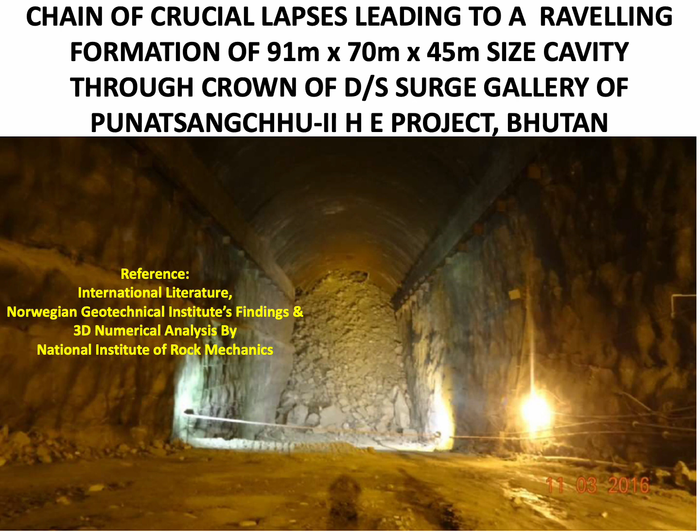In this case study, I am going to present the chain of critical lapses which ultimately led to the ravelling failure of rock mass, which formed a huge cavity of a size of a football field and of one third the height of the Eiffel Tower to the crown of the cavern of Downstream Surge Gallery of Punatsangchhu II Hydroelectric Project in Bhutan. The crown of the Downstream Surge Gallery, having been excavated and supported since 2013, saw massive rock mass failure occur after 3 years, on 11th March 2016.

Unfortunately, 6 technicians got buried dead under the failure falling muck. Billions of rupees got wasted, and uncertainty of completion of the project with 6 years of delay as of December 2022 crept in.

During the presentation, I'll be making reference to a number of international literature and also to findings of Norwegian Geotechnical Institute in their case study taken up by them, and also I'll be referring to 3D numerical analysis done by National Institute of Rock Mechanics, India.

The Punatsangchhu-II hydroelectric project was originally studied and designed to be a surface powerhouse in the detailed project report. However,

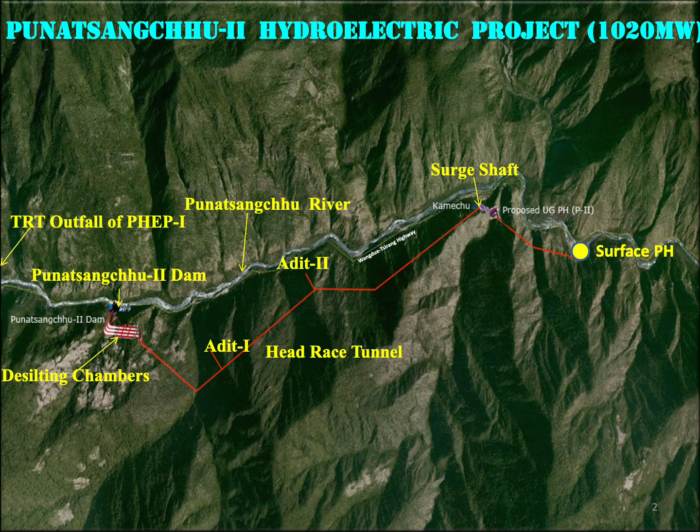during April 2010, just before taking up the construction of the project, a crucial decision was taken by the consultants of the project to shift the powerhouse complex location to an underground location 3.1 kilometer inside the right hand side hill of the river valley.

This necessitated introduction of a 3.1 kilometer length of tail race tunnel, and also it necessitated introducing a downstream surge gallery.

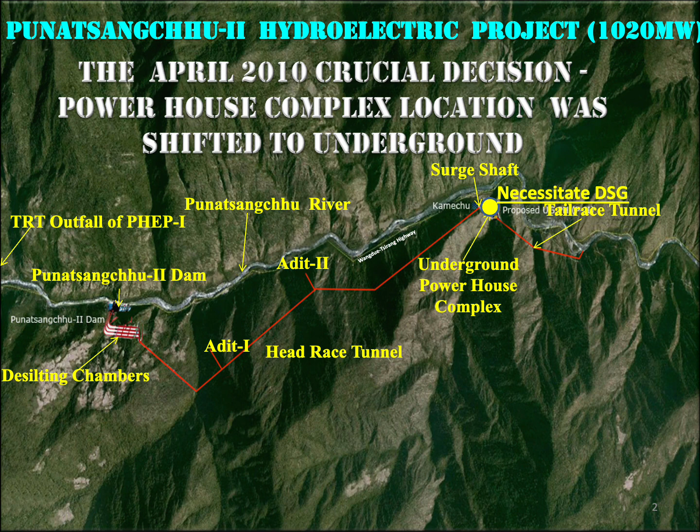Thus, the powerhouse location was changed from the DPR approved surface powerhouse to the underground as decided by the consultants WAPCOS and the design consultants Central Water Commission.

The first of the crucial lapses had happened during May to October 2010 when, during the geological investigations done by the consultants for deciding the underground location, a lacking and misrepresentative geological investigation done by consultants had landed the powerhouse complex in an unsafe underground location.

The 314-meter long downstream surge gallery site was investigated by the consultants who decided the change of location based on merely one borehole, DSC1. The other borehole, DSC3, was driven by the consultants at a different and faraway location to that suggested by their own geology consultants, Geological Survey of India.

The downstream surge gallery had actually encountered an intersection by a mega shear zone, which was far away from borehole DSC1. Actually, all 3 caverns - the powerhouse, transformer hall, and downstream surge gallery - were to be intersected by the mega shear zone, which was missed during the geological investigations while deciding the new location of the powerhouse complex.

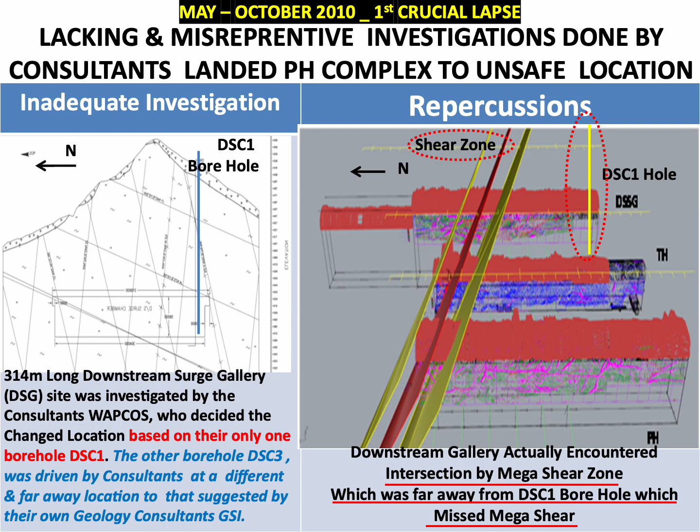The second of the crucial lapses in planning and design had happened during December 2010 when, after a limited geological exploration done for deciding the changed location, the designers had decided a huge 314 meter into 58 meter into 19 meter sized Downstream Surge Gallery, despite a warning having been given by their geological consultant, Geological Survey of India.

That resulted in a very fragile structure for the Downstream Surge Gallery. The Geological Survey of India had reported in 2010 that shear highly fractured zones may be encountered in the surge cavern. They strongly recommended minimizing the size of the surge chamber as far as possible.

CWC, the designers, had still provided, despite this warning, the huge size of 314-meter long, 58-meter high, and 19-meter wide Downstream Surge Gallery.

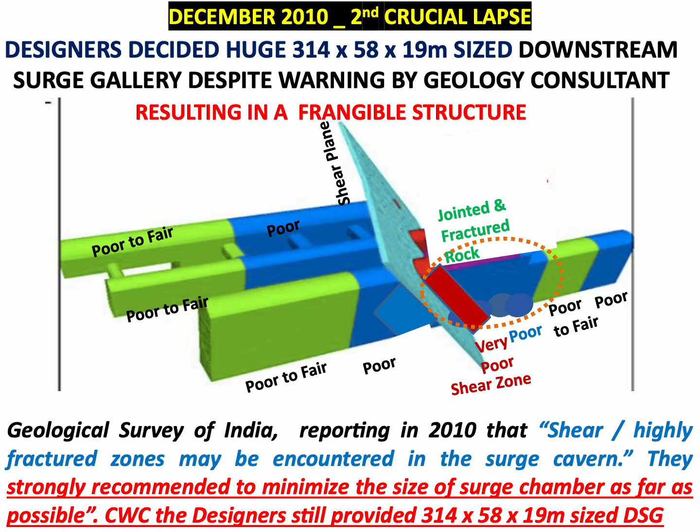Due to the limited and misrepresentative geological explorations done for deciding the changed location, the geological interpretation had gone wrong.

The designers had considered, as interpreted from the limited geological exploration, a fair to good quality of rock to be available in the three caverns.

However, actually, the geology came out to be poor to very poor against this interpretation of fair to good considered by the designers. The actual geology comprised of leucogranite with micaceous quartzite, biotite gneiss, and pegmatite veins and bands, which were low dipping foliations with clay coatings.

A significant length of the caverns comprised class 5 loose rock mass, thinly foliated, highly fractured biotite gneiss with leucogranite and crushed pegmatite, with Q value 0.19 to 0.58, where excavation progressed by chipping and scaling with no blasting. This class 5 rock was encountered more significantly in the Downstream Surge Gallery.

A major portion of the Downstream Surge Gallery comprised class 4 altered rock mass with Q value 1.5 to 2, thin shears and seams, and sheared, crushed and fractured rock masses which were highly jointed with clay coating alongside intersecting joints. Excavation progressed with 0.18 to 0.36 kg per cubic meter of charge in this reach. Slabbing and wedge failures were predominant.

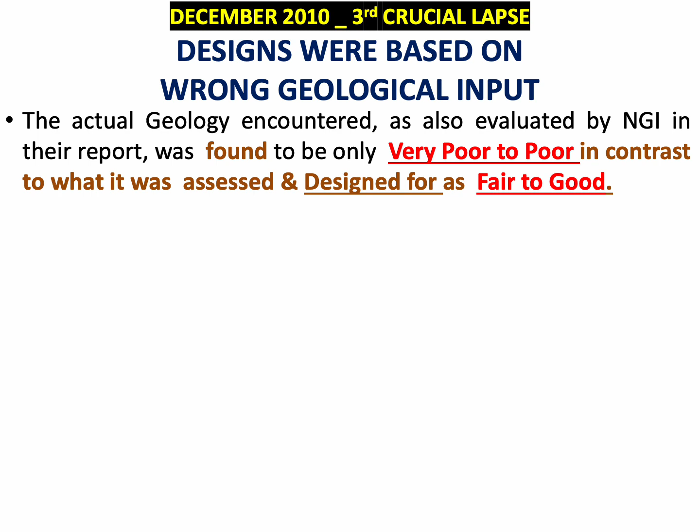It can be seen that there was no trace of good and fair rock as assessed during the geological investigations. The Powerhouse cavern had 54% poor rock and only 44.8% poor to fair.

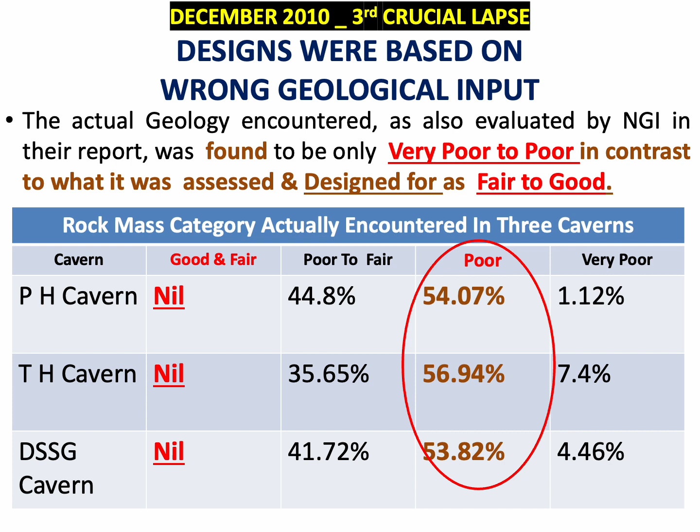The Transformer Hall cavern had 57% poor rock and only 36% poor to fair. The Downstream Surge Gallery had 54% poor rock and 5% very poor rock, that of class 5 and shear zones, with only 42% poor to fair. There was no trace of any fair to good rock, which was the basis of the designs, including importantly the layout design of the powerhouse complex.

Excavation of the powerhouse complex started in 2012 with construction of the main access tunnel to the powerhouse, and construction adit to the Downstream Surge Gallery also taken up in 2012. A shear zone was met in the construction area of the main access tunnel to the powerhouse in 2012.

The resident geologist of the project apprehended that if the shear zone didn't get pinched, it would cut across the three caverns of powerhouse, transformer hall, and downstream surge gallery. Accordingly, the same shear zone apprehended in 2012 did meet the three caverns in their central gullet in April 2013.

A 3.5 meter thick major shear zone was encountered at RD 124 meter of the downstream surge gallery, with an inclination of 45 to 60 degrees and an orientation of north 30 degree east, cutting all through above the crown to the bottom of the downstream surge gallery. It resulted in formation of a hanging wall, and a 9 meter high chimney was made in the downstream surge gallery's central gullet at RD 124 meter.

This necessitated a change to the layout and design of the three caverns in April 2013, when the major shear zone was revealed in the downstream surge gallery's central gullet.

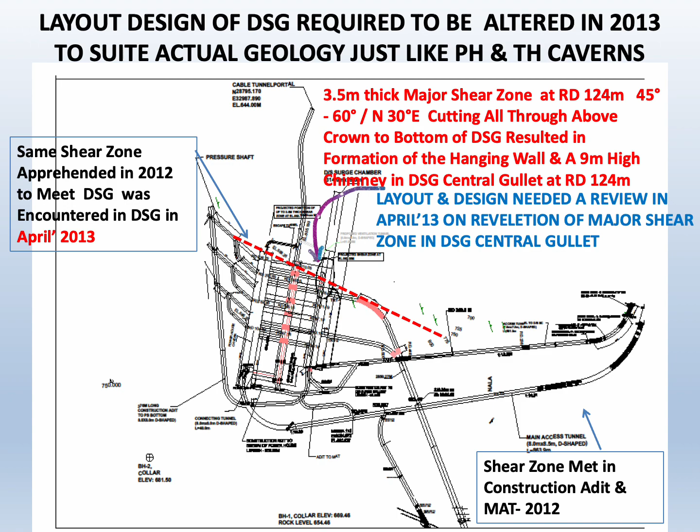Excavation of the three caverns started from their southern ends. The starting point of excavation at the southern end in the downstream surge gallery was accessed earlier than the starting point of excavation in the powerhouse and transformer hall. The excavation in the central gullet of the downstream surge gallery was thus progressing ahead of the powerhouse and transformer hall. The major shear zone was therefore met in the central gullet of the downstream surge gallery at RD 124 meter, while excavation in the powerhouse and transformer hall had not yet progressed to the reaches where the shear zone would have been encountered.

The resident geologist of the project suggested to the designers at that time that in order to avoid the cutting of the three caverns by the shear zone, their layout be altered and redesigned.

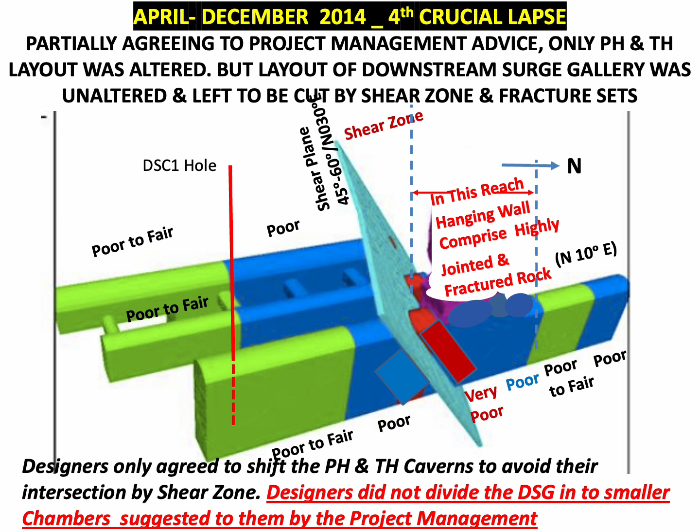Partially agreeing to the advice of the resident geologist, the designers had altered the layout of only the powerhouse and transformer hall, shifting these two caverns south by 36 meters and 18 meters respectively. However, the layout of the downstream surge gallery was left unaltered, and was thus intersected in the middle throughout its full depth of 58.5 meters by the shear zone.

The hanging wall reach, which was following the shear zone in the downstream surge gallery, comprised multiple sets of joints and fractured rock mass, with joints filled with clay and crushed material.

At that time, during April to December 2014, a crucial decision should have been taken by the designers to avoid the downstream surge gallery being cut by the shear zone. The function of the downstream surge gallery is only to provide enough volume to supply water efficiently to the tail race tunnel on sudden shutdown of the turbines, and also to accommodate the discharge coming from the turbines immediately on sudden start, before it is gradually released into the tail race tunnel. This function can be achieved by providing an interconnected set of smaller chambers with equivalent volume to the one huge downstream surge gallery.

The project management had at that time suggested to the designers that, in order to avoid cutting of the downstream surge gallery by the shear zone, they could provide a distributed arrangement of smaller interconnected chambers instead of one huge cavern. However, the designers preferred to keep the huge size of the downstream surge gallery and did not alter its layout.

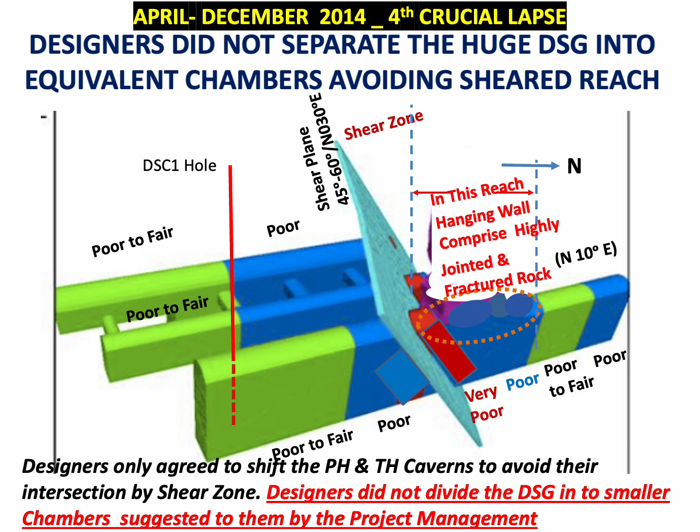Having shifted the powerhouse cavern by 36 meters and the transformer hall cavern by 18 meters, the major shear zone was ensured to be merely touching the gable ends of both caverns. Therefore, there was no hanging wall present in either the powerhouse or transformer hall cavern, which was a big plus point for their stability.

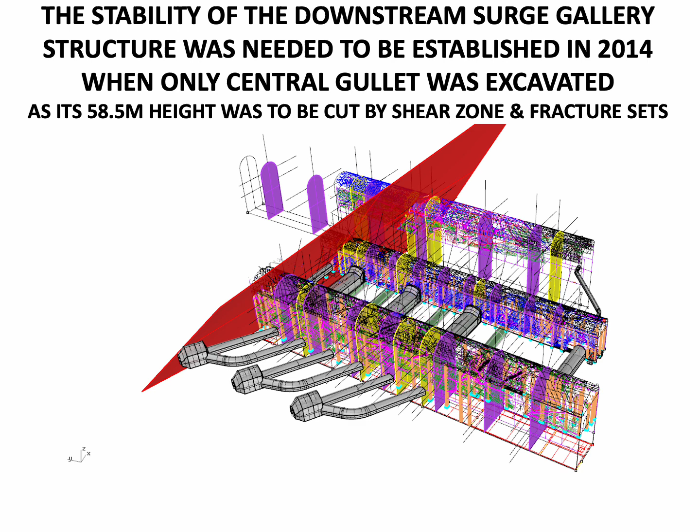However, as the major shear zone was to definitely intersect steeply the downstream surge gallery throughout its full height, it would have been imperative to establish the stability of the downstream surge gallery cavern scientifically through detailed 3D numerical modeling in 2014 itself, when only the excavation of center gullets was completed in all three caverns. This should have been done before proceeding further with side slashing and benching down to its full depth of 58 meters.

3D numerical analysis incorporating the actual joint sets and shear zone present in the downstream surge gallery cavern was needed to evaluate structural stability. However, it seems this analysis was not done by the designers, and only symptomatic spot treatments were recommended, ignoring impending displacements and stress distribution that would result from excavation to the huge benching depth of 58 meters.

It is apparent that the 3D numerical analysis was not done throughout the stage of excavation of these three caverns during April 2013 to March 2016, when the mishap occurred. It was only in 2018, after the mishap, that the National Institute of Rock Mechanics was brought in to do the analysis at the request of the project authority.

The original design, based on the misrepresentative geological interpretation, was merely augmented by symptomatic addition of a few spot rock bolts here and there in the crown of the cavern, and a dental treatment recommended in the walls at portions cut by the mega shear zone. The basic character and methodology were not revised or changed, with no scientific analysis apparently done of the situation in the downstream surge gallery.

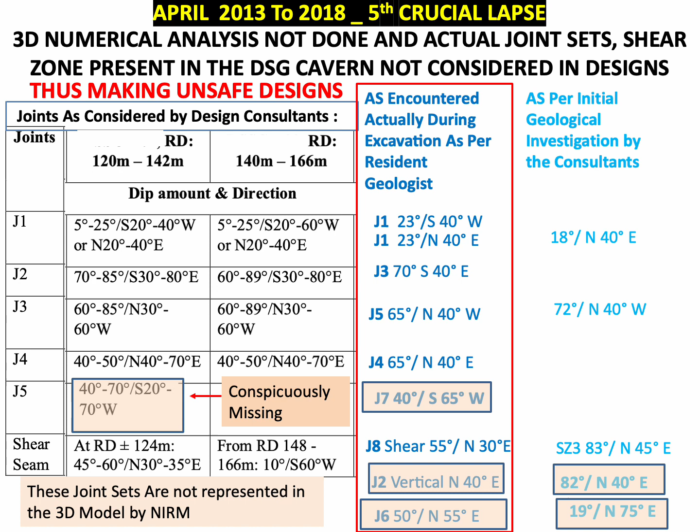All the actually present joint sets, which would have compromised the stability of the hanging wall reach following the steeply dipping traverse of the major shear zone, had remained unaccounted for in the designs of the downstream surge gallery.

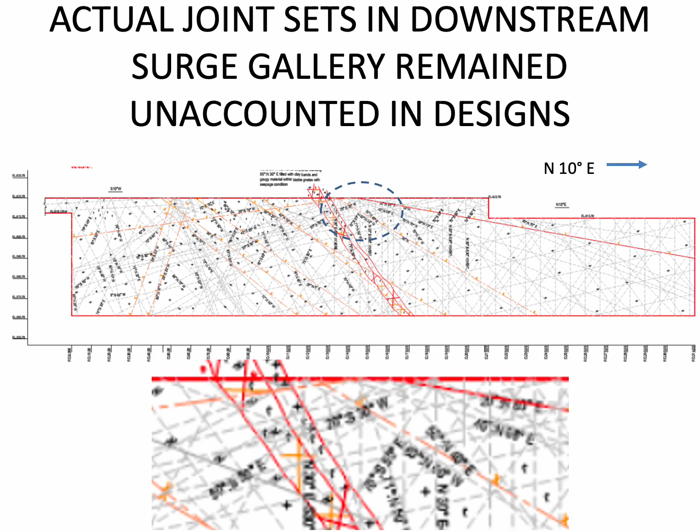The 8 types of sets of wedges formed out of the intersection of vertical and subvertical joint sets which were actually present—made out of intersection of joints J2 and J3, J3 and J7, J5 and J7, J2 and J5, J5 and J4, J3 and J8 (shear), J3 and J4, and J3 and J6—are all very critical and potentially very unstable. These joint sets forming these wedges are vertical and subvertical and much steeper than the angle of internal friction of the rock mass.

With the presence of crushed material and clay in the gaps of these joint sets, they make a large zone of stress relieved rock mass.

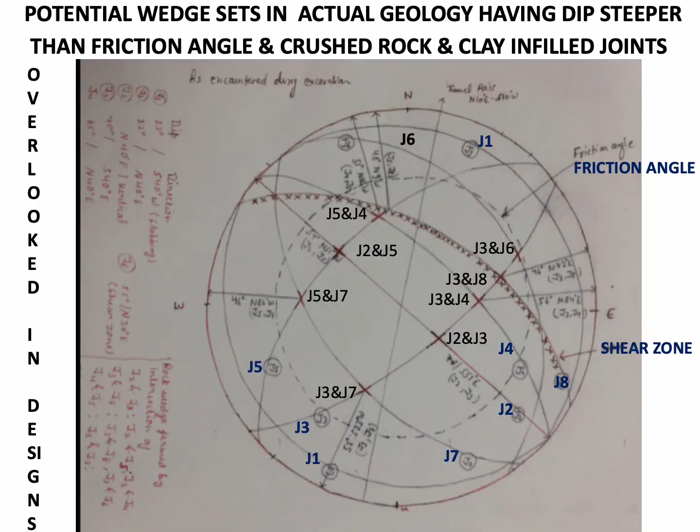International literature cautions that large numbers of adversely oriented joint sets would result in overbreaks and loose rock falls. The published international paper titled '40 Years with the Q System in Norway and Abroad,' authored by Nick Barton and Eystein Grimstad, makes an important interpretation from the joint set number and joint roughness number parameters of NGI's rock mass quality index Q.

The paper recognizes that in underground excavation, where the ratio of joint set number to joint roughness number, that is Jn by Jr, exceeds 6, overbreaks are extremely likely to occur despite contractors' best efforts with careful blasting.

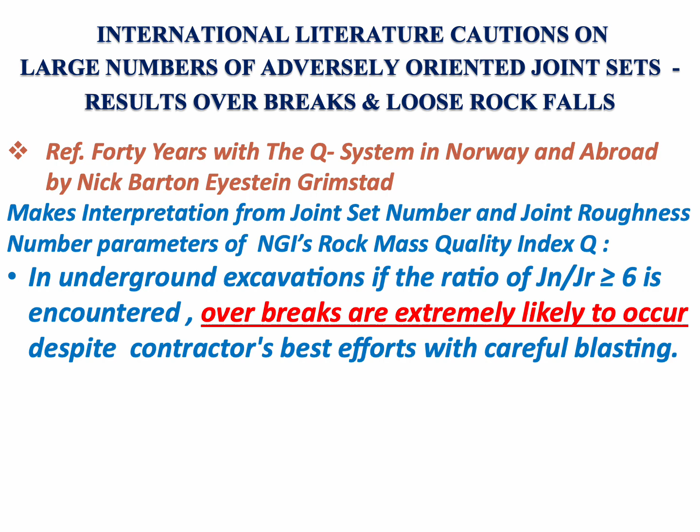In the Punatsangchhu-II case of powerhouse caverns, the ratio Jn by Jr is of the order of 9 to 12.

This explains the prevalent tendency of overbreaks and slabbing falls in these caverns of the Punatsangchhu powerhouse complex, despite excavation progressing by merely chipping without resorting to any blasting in the reach of class 5 rock mass classification, and only resorting to 0.18 to 0.36 kg per cubic meter of charge in the case of class 4 reach of the caverns.

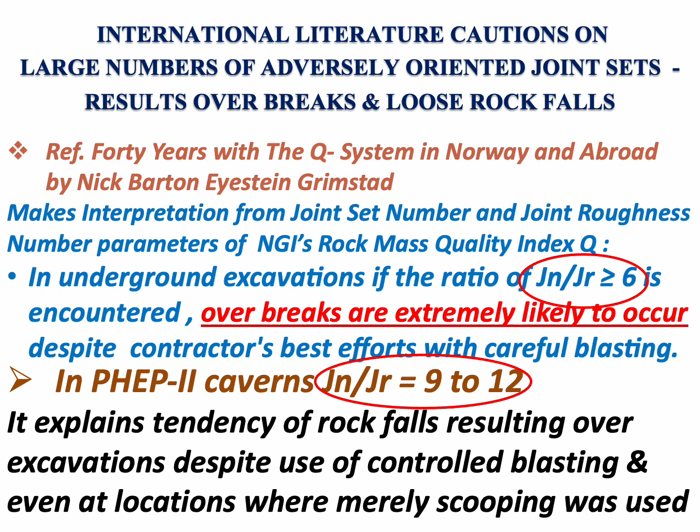For the kind of rock fall tendency frequented in the 3 caverns of the powerhouse complex in the Punatsangchhu-II project, there is a very relevant reference in the well-known authors Hoek and Brown's book titled 'Design of Underground Excavations in Rock.'

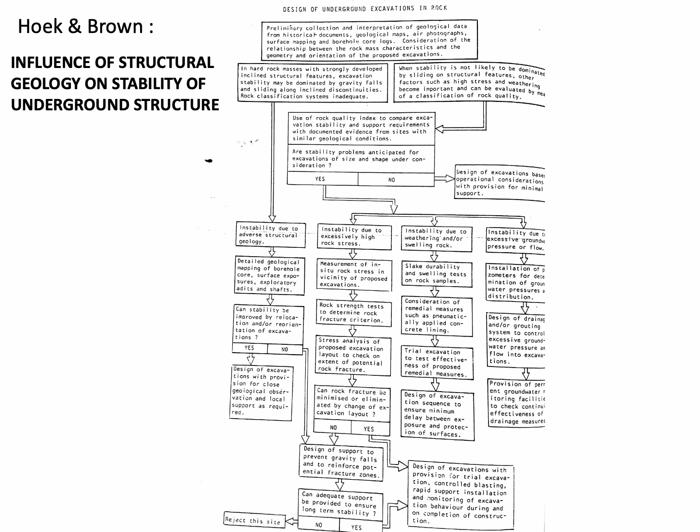In this book, they state that in hard rock masses with strongly developed inclined structural features, excavation stability may be dominated by gravity falls and sliding along inclined discontinuities.

Therefore, the rock classification systems may be inadequate to handle these kinds of situations.

The authors have advised that to evaluate the influence of structural geology on the stability of underground structures, one needs to check whether the underground structure is subjected to instability due to adverse structural geology.

With the availability of modern analysis tools nowadays, a 3D numerical analysis is the best method to check the stability of the underground excavations.

So if the analysis finds that the adverse geology is causing instability to the underground structure, then the authors recommend that a second check be made, which requires evaluating whether the stability can be improved by relocation and/or reorientation of the excavation.

If the stability is seen not to be improved by relocation or reorientation, then it recommends a third check be made—that is, whether adequate rock support can be designed to improve the stability.

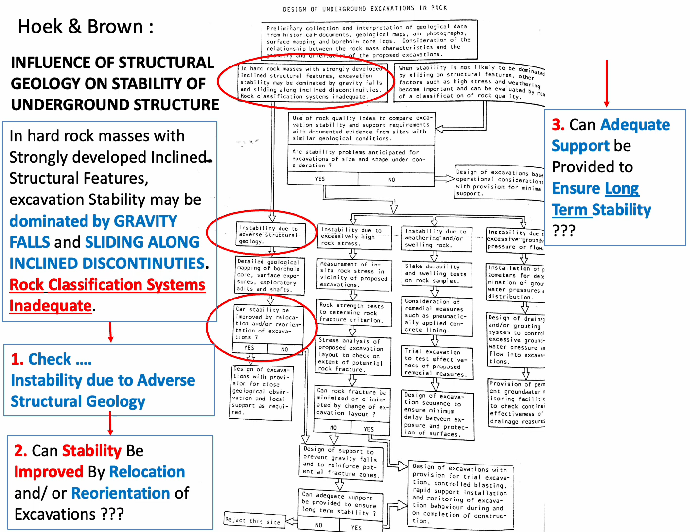However, if no design measures are seen to be feasible to improve the stability, then as per the renowned authors, the only recourse left is to abandon and reject the site due to its adverse geological structure.

The Q-based design practice develops an arch action and strengthens a very localized stress relieved zone in the rock mass. Steel ribs come into action only when needed to provide limited passive support to the backfill concrete or the limited localized rock mass volume.

In the geological conditions found in the Punatsangchhu-II project powerhouse complex, which had multiple strongly developed inclined structural discontinuities, the designers should have checked the stability of the three caverns with a 3D numerical analysis, which they obviously did not do until after the failure, when they hired NIRM, the agency, to perform a 3D analysis.

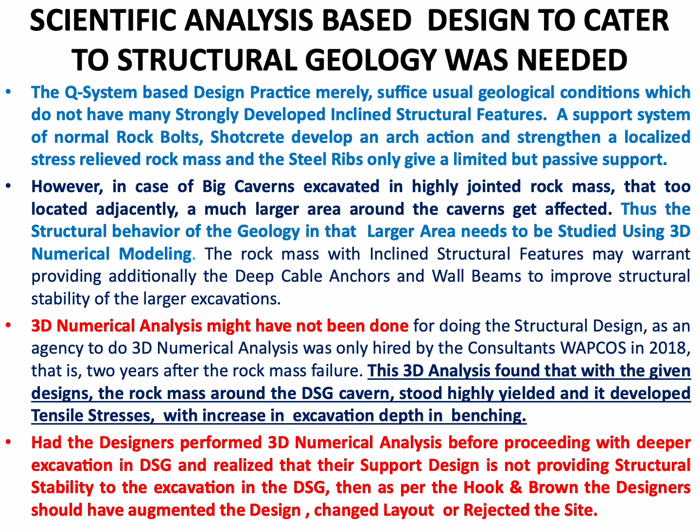As seen in the results of this 3D analysis, the Q system based design provided by the designers resulted in extensive yielding of the rock mass, causing stress relieving to greater depths and developing tensile stresses above the crown in the downstream surge gallery with increase in depth of excavation. Had the 3D numerical analysis been done at the right time, before proceeding with deeper excavations, the designers would have realized the need to either augment the designs, change the layout of the downstream surge gallery, or even reject the site, as advised in the literature by Hoek and Brown.

The designers were requested at least 29 times during the year 2014, in various project review meetings held with the chief designer of the consultants, and also through various geological notes supplied to the designers highlighting the criticality of the geology and requesting a review of the designs, but to no avail.

However, the sixth crucial lapse happened when in December 2014 the designers ignored the warning and just trashed aside the numerical analysis carried out by the concerned civil contracting agency of the powerhouse. This numerical analysis had established that with the given designs, the downstream surge gallery would become unstable with widespread massive yielding of the rock mass.

Yielding would occur in the rock pillars of the downstream surge gallery when excavation reached towards two-thirds height of the gallery, around 38 meters of excavated depth, with further yielding reaching around 100% in the walls when excavation proceeded to the full depth of 58.5 meters.

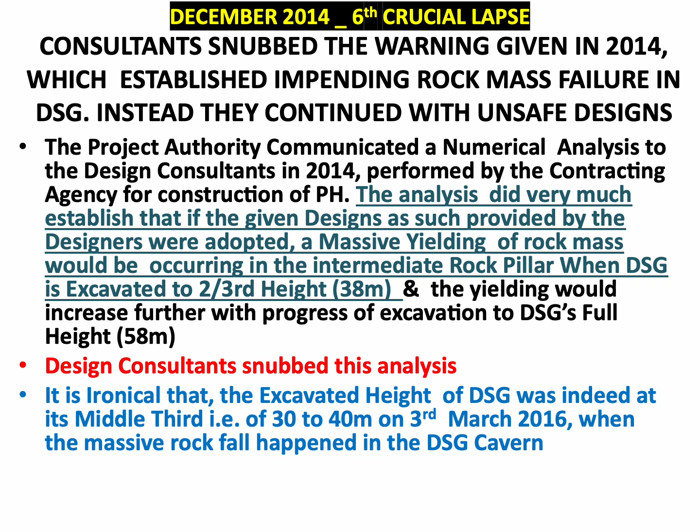As a widely accepted practice, brought out in a paper authored by Cheng Y and Liu, published at the 6th Congress of ISRM held in Montreal, the pillar width between two adjacent caverns should be equal to or more than the depth of the deeper cavern of the two adjacent caverns.

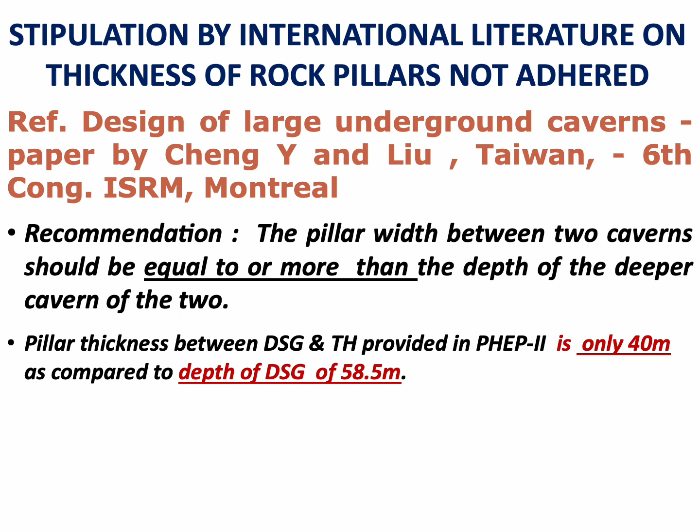The pillar thickness between the downstream surge gallery and the transformer hall in the Punatsangchhu-II powerhouse complex is only 40 meters, as compared to the depth of the downstream surge gallery of 58.5 meters.

Thus, even for normal rock mass conditions, the rock pillar should have had a thickness of 58.5 meters, equal to the depth of the deeper of the caverns, that is the downstream surge gallery. Moreover, under the prevailing geological conditions in the downstream surge gallery, having class 4 and class 5 rock mass...

Also, where the downstream surge gallery is intersected through its full depth by the shear zone, the provided thickness of 40 meters for the rock pillar between downstream surge gallery and transformer hall was far below the requirement, as stipulated and going by accepted practice, of having a requirement of at least 58.5 meters.

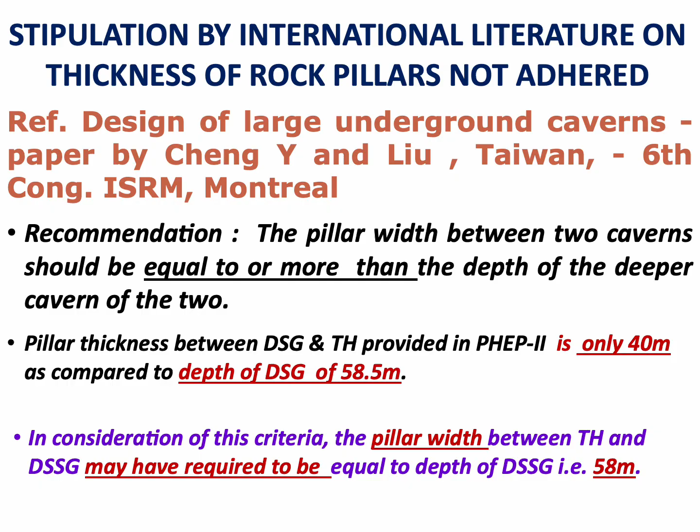The shear zone thus created a pre-cracked section of the rock pillar and the downstream wall in the downstream surge gallery. The northern block of the pre-cracked section, lying over the southern block, was free to slide on this steep shear zone.

As a result, in November 2014, when the depth of excavation in the downstream surge gallery had reached merely 15 meters, a subsidence of 55 mm occurred in the downstream wall between RD 130 meter to RD 170 meter, and a subsidence of 20 mm occurred in the upstream wall between RD 170 meter to RD 180 meter.

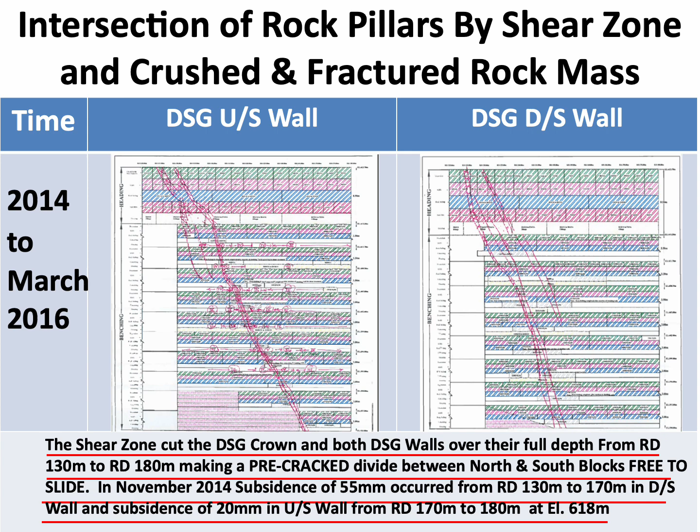The upstream wall of the powerhouse complex and the rock pillar between the powerhouse cavern and transformer hall cavern were more vulnerable, with multiple openings for pressure shafts and bus ducts. However, it was the upstream wall, the rock pillar between transformer hall and downstream surge gallery, which lacked sufficient thickness and was further weakened by intersection with the shear zone, making it a pre-cracked rock pillar.

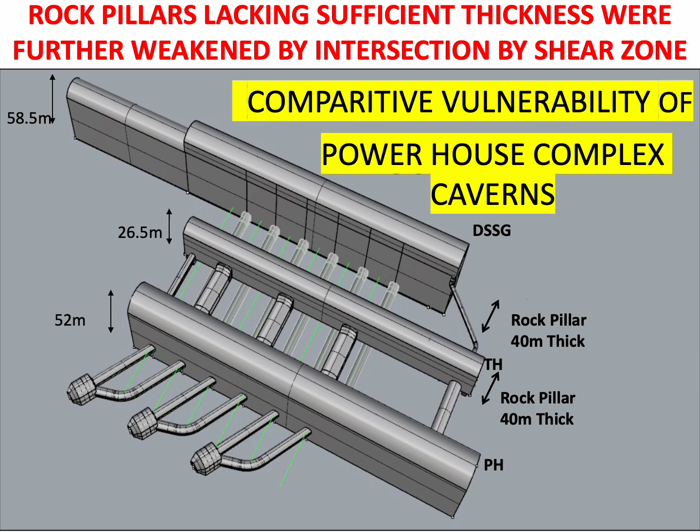The rock support for the Downstream Surge Gallery was initially designed before excavation began, when the shear zone cutting the gallery was not yet encountered or known. This support system comprised 200 mm thickness of SFRS and 8 to 10 meter long rock bolts at 1.5 by 1.5 meter spacing. The rock mass conditions at that time were considered fair to good, as stated in the geological consultant's report.

As excavation in the Downstream Surge Gallery proceeded further in benching, the shear zone was seen cutting both walls, traversing at a steep dip of 45 to 60 degrees, orientation north 30 degree east.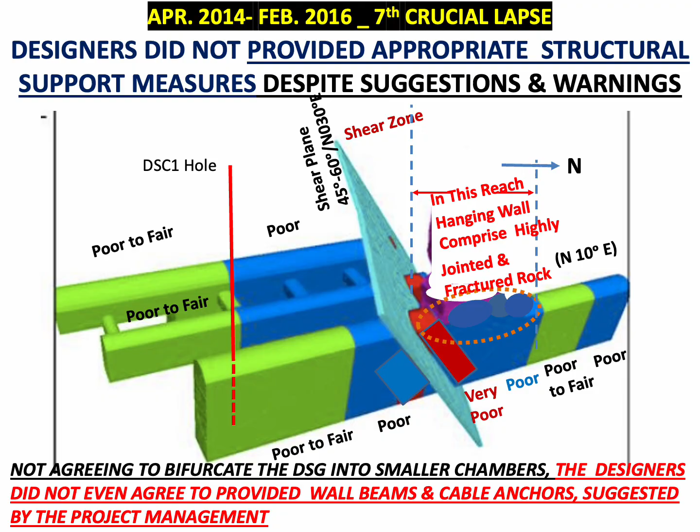As indicated earlier, in 2014 a numerical analysis done by the civil contractor constructing the powerhouse complex showed that there would be widespread yielding in both walls of the Downstream Surge Gallery as benching would progress. Therefore, management suggested the designers either bifurcate the Downstream Surge Gallery into smaller chambers, which was not agreed to.

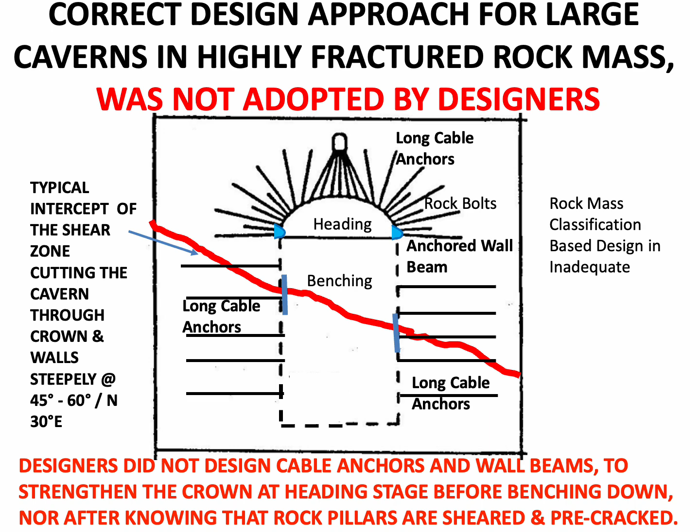Thereafter, management suggested providing wall beams at the spring line and cable anchors in the crown, with suggested wall beams throughout the depth of the Downstream Surge Gallery walls, to strengthen and provide structural stability to the gallery. This was not adopted by the designers, even though it was well known by that time that the rock pillars had sheared and were behaving like a pre-cracked section.

The authors Hoek and Brown, in their book Design of Underground Excavations in Rock, suggest providing cable anchors, noting that cable anchors are particularly effective to improve the stability of underground excavations facing instability due to adverse geology in hard rocks which are faulted and jointed with several sets of steeply inclined discontinuities. The reach in the Downstream Surge Gallery, from RD 130 meter to 170 meter or so, comprised highly jointed and fractured rock mass, and therefore the provision of cable anchors was definitely warranted.

The designs provided at locations of shear zone class 5 and class 4 included only rock bolts, and as informed earlier, one set of which had their end anchorage in sheared or fractured rock mass. This may have been too little treatment to withstand the shearing forces imposed by the structural features.

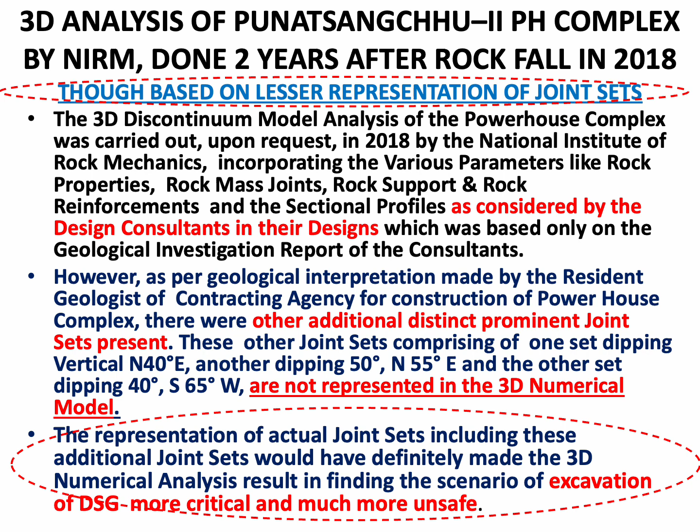The 3D analysis done by NIRM in 2018 confirms that the rock pillars on the hanging wall side stood widely yielded. The analysis shows that without the provision of wall beams and cable anchors in the insufficiently thick rock pillar intersected by the shear zone — dividing it into two pre-cracked blocks, the upstream rock pillar and the upstream wall of the downstream surge gallery between RD 145 meter and RD 195 meter — it stood extensively yielded up to a depth of 15 meters into its thickness, with a strength to stress ratio of 0 in the yielded reaches.

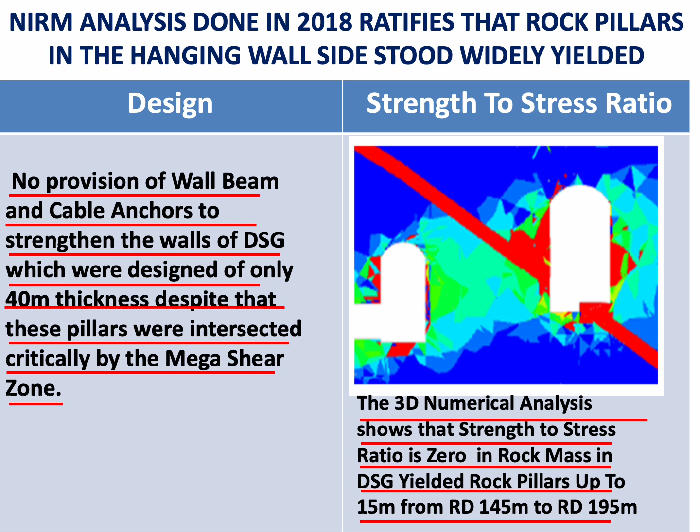The transformer hall was also fully excavated. The bus ducts connecting the powerhouse complex and the transformer hall were fully excavated, thereby creating large openings in the downstream wall of the powerhouse and the upstream wall of the transformer hall.

All six draft tubes were also excavated through their lengths, but they were yet to be excavated to the depth where they entered into the Downstream Surge Gallery. Thus, the Downstream Surge Gallery had been excavated to a depth of 35 to 40 meters against its full depth of 58.5 meters.

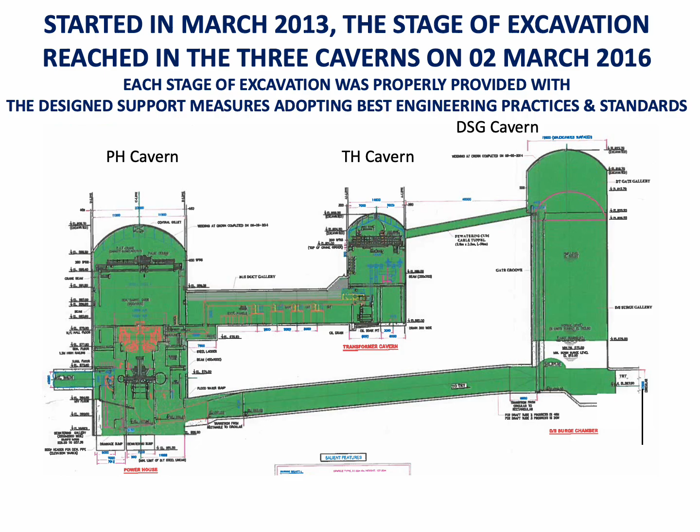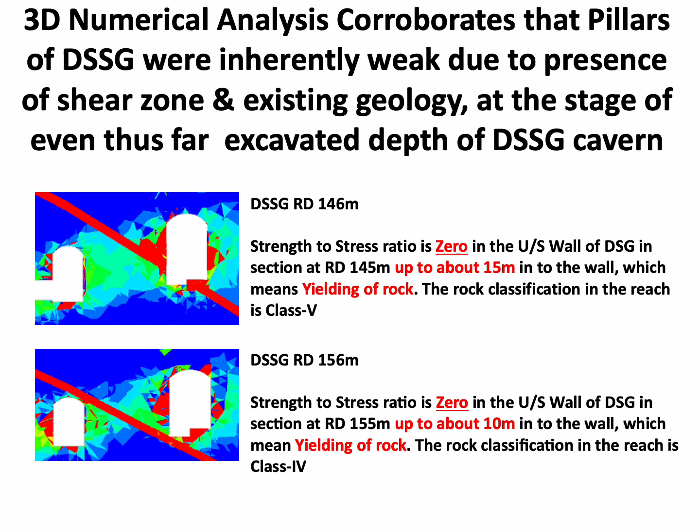As was earlier informed in 2014 through numerical analysis done by the contractors of the powerhouse complex, and also ratified later in the numerical analysis done by NIRM, when the benching excavation had reached in the Downstream Surge Gallery to its critical depth of two-thirds the height of the gallery, to a depth of around 30 to 40 meters, widespread yielding had occurred in the walls of the Downstream Surge Gallery. As a result, a cavity of 91 meter height, 70 meter length and 45 meter width formed at the Downstream Surge Gallery's crown, 3 years after the excavation had started.

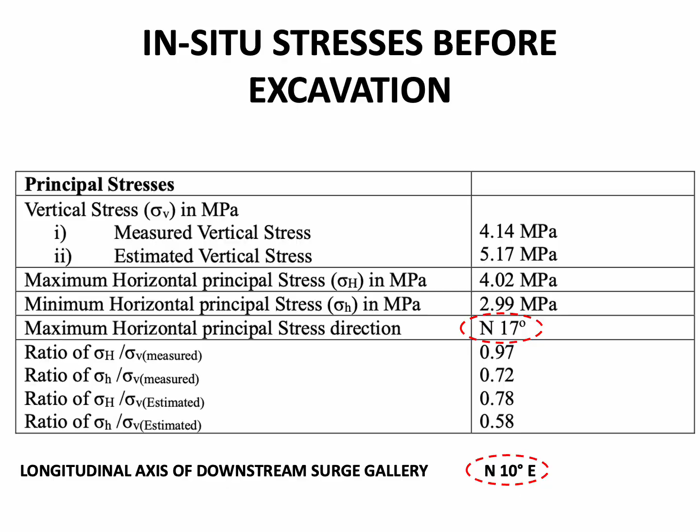The hanging wall side of Downstream Surge Gallery, situated between RD 136 meter to RD 195 meter in the north of the shear zone, comprised rock blocks assemblage with their joints filled with fractured and crushed material. Thus the rock mass in the hanging wall has a large variability of strength compared between the intact rock and the rock mass. The uniaxial compressive strength of the intact rock is 55 MPa.

The uniaxial compressive strength of the 3.5 meter thick shear zone is 3 MPa. The uniaxial compressive strength of the rock mass in the hanging wall is only ranging between 1.08 to 2.84 MPa. The strength of the rock mass is reduced to a value of 2 MPa, whereas its constituent intact rock has a strength of 55 MPa. This is due to the fact that the rock mass in the hanging wall is excessively jointed with joints filled with fractured and crushed material, which makes the rock mass very weak.

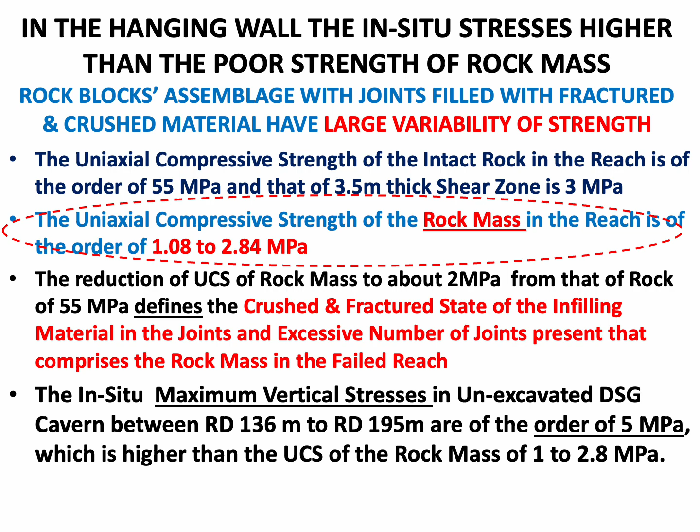Let us review the principal stresses in the Downstream Surge Gallery in its excavated state, in a reach starting immediately after the shear zone towards the north in the hanging wall portion.

The results of the 3D numerical analysis carried out in 2018 by NIRM show that the value of major principal stresses, which are aligned parallel to the longitudinal axis of the Downstream Surge Gallery in this reach of the hanging wall, were marginalized to a value of 2 MPa after excavation had reached a depth of 35 to 40 meters, as compared to the in situ major principal stress value of 4.02 MPa present before excavation in this reach. The major principal stresses in the Downstream Surge Gallery in the hanging wall portion thus has its value just equal to the uniaxial compressive strength of the rock mass.

The relaxation zone above the crown of the Downstream Surge Gallery is seen extended to a height of around 100 meters above the crown.

The fact that the major principal stresses are developed to a value of 7 MPa in the near vicinity of the crown, in its limited thickness, proves that the arch action stood very much developed in the crown in the hanging wall portion of the DSG also, which is pre-stressed by rock bolts.

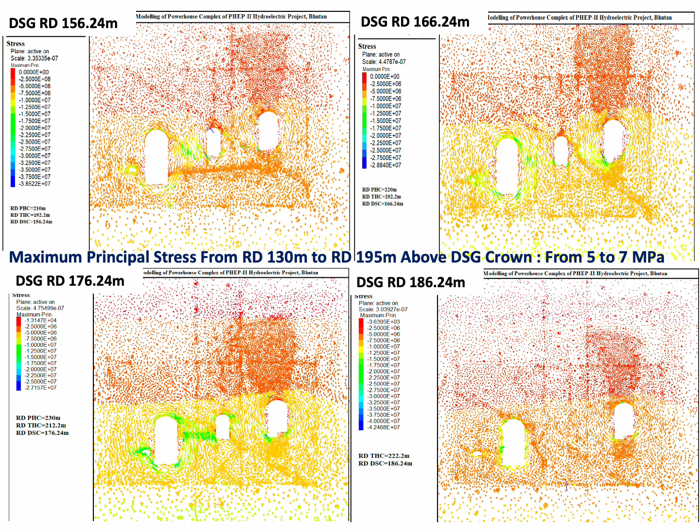It shows that the trend of marginalization of major principal stresses to a value of 2 megapascals is seen continuing from RD 136 meter to RD 195 meter or so. The size and shape of the relaxed zone developed above the crown in this hanging wall reach of downstream surge gallery between these RDs is peculiarly similar to the size and shape of the cavity developed during the massive rock mass failure which happened on 2nd March 2016, as would be seen in the slides coming after.

As the rock mass condition stood improved in the northern side in the downstream surge gallery beyond RD 196 meter, the value of the major principal stresses developed in this reach are seen to get back to the value of 5 to 8 MPa in the rock mass above the crown and in the location of the arch formed due to the pre-stressing achieved by the rock bolts provided in the crown in this reach.

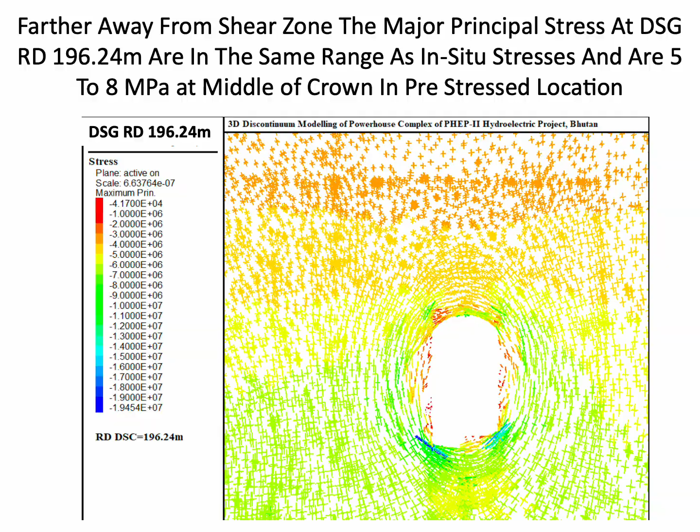The existing state of stresses around an excavated underground opening are very important for the stability of the underground openings. Moderate stresses around an excavated section are usually favorable for its stability. Low stresses around the excavated section are often unfavorable for the stability.

In the present case of downstream surge gallery of Punatsangchhu-II hydroelectric project, the major principal stresses in the downstream surge gallery cavern are oriented along the direction of longitudinal axis of the downstream surge cavern, but it does not provide confinement at interface with shear zone in the hanging wall. The in situ stresses being more than the rock mass strength has resulted the rock mass in joints to be fractured and crushed, thus making rock blocks present in the hanging wall prone to displacements.

Whereas the minor principal stresses present in the downstream surge gallery cavern are oriented along direction of transverse axis of the downstream surge gallery cavern. The layout of cavern was such that the minor principal stresses are so oriented which provide confining pressure to retain arch action in the crown of downstream surge cavern.

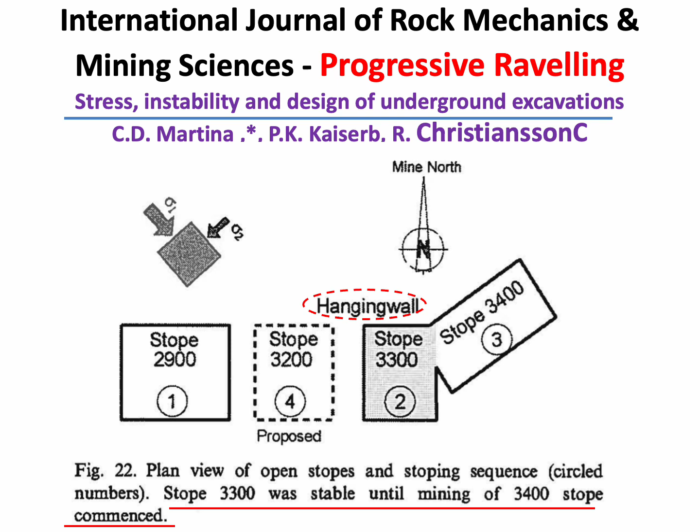The overall massive sulfide ore zone at depth in this case study was 300 meters along strike and 45 meters in width from footwall to hanging wall, and dipped between 65° to 85°. So the geometry of the hanging wall, dipping at 65° to 85°, has a crucial role to play for the stability of stope number 3300. We'll see how it, in combination with low stresses, affects the stability of the stope.

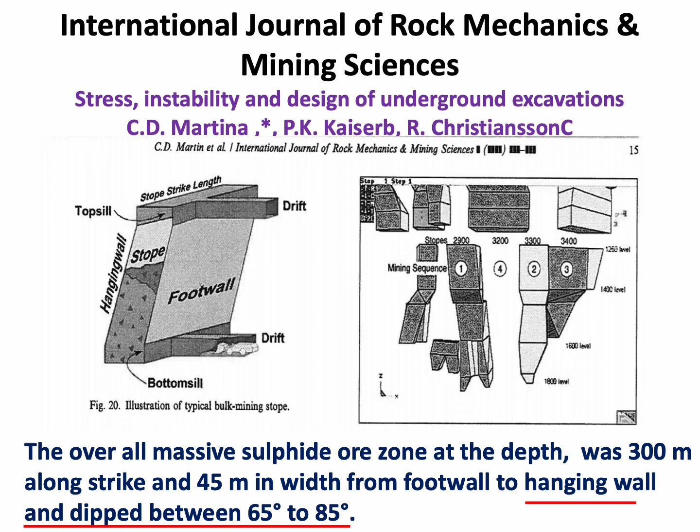The diagram on the right side shows the plan of stopes and the sequence of excavation. Stope number 3400 is in continuation to the earlier excavated stope number 3300. The stopes discussed in this paper are mentioned to average 35 meters in width, 45 meters in length, and over 180 meters in height.

The paper states that experience at the mine indicated stopes of these dimensions were stable. However, stope number 3300, which had similar good quality rock mass conditions, experienced significant hanging wall problems, with the hanging wall dipping at 65 to 85°.

The hanging wall rock mass consisted of blocky norites with one subvertical joint set at approximately 1 meter spacing and a second set of horizontal continuous joints also at approximately 1 meter spacing. These fracture sets formed potential wedges in the hanging wall and back of the stopes.

However, simple wedges do not usually lead to progressive ravelling, particularly when the geological strength index ranges from 60 to 85, with compressive strength 25 to 100 MPa, tensile strength of minus 0.4 to minus 2.65 MPa, and a modulus of 27 to 80 GPa. These simple wedges would not have led to progressive ravelling, the paper mentions.

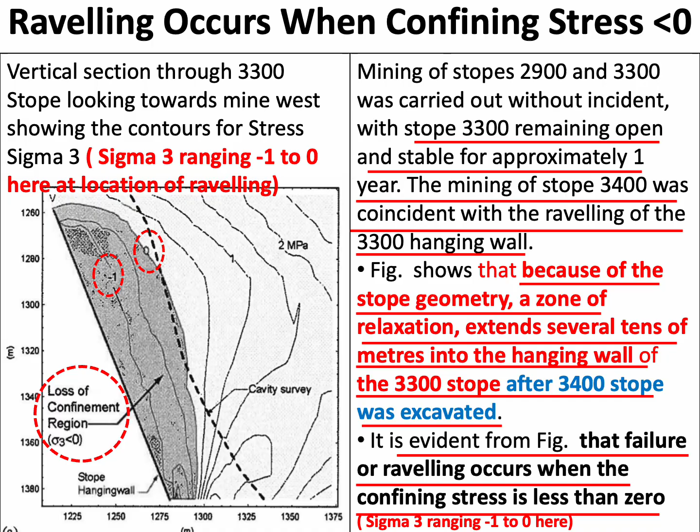The confining pressure also influences the ductility of the rock mass. The higher the confining pressure, the greater the ductility observed of the rock mass, and vice versa - lesser the confining pressure, the lesser the ductility. The behavior would be more brittle if the confining pressures are less.

This results in a quick vicious circle of ravelling failure: when the confining pressure becomes tensile, ravelling occurs, and as ravelling progresses, the increase in strain rate makes the rock appear more brittle. So therefore the ravelling failure would be very sudden and brittle.

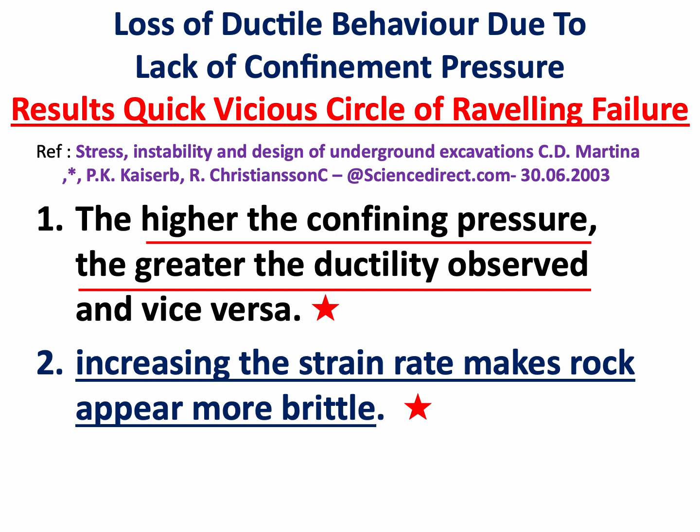The paper, Stress Instability and Design of Underground Excavations, after pointing out that ravelling would occur when the confining pressure becomes very low or tensile, notes that the progress in ravelling, with the strain rate increasing, makes the rock appear more brittle.

The third thing that the paper establishes is the extent of depth of failure. It mentions that in the structurally controlled, gravity-driven process leading to wedge-type falls of ground in underground excavations, it is actually the variability in rock strength rather than stress that is responsible for the frequently observed variability in depth of failure and failure mode.

If there is more variation in the rock strength of the rock mass, there will be more depth influenced by the ravelling failure.

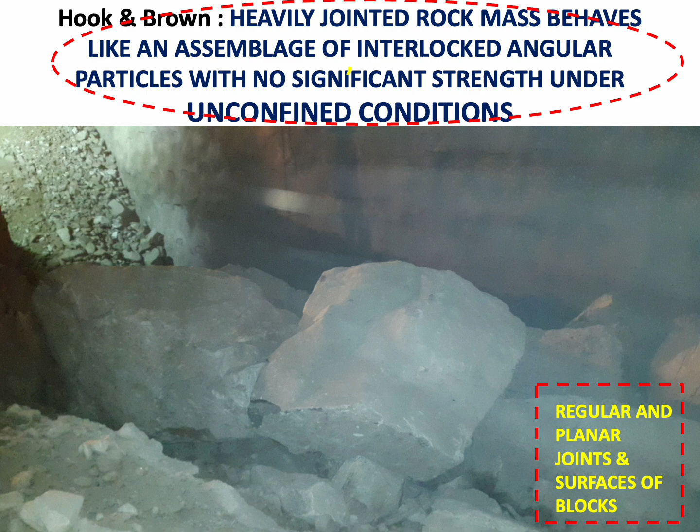With all other prerequisite conditions having been met, the heavily jointed blocks in the yielded rock mass in the crown of the downstream surge gallery were just waiting for a trigger to happen, which can cause the rock mass to behave as a mere assemblage of rock blocks and result in a ravelling fall of rock blocks one after the other.

The removal of the confinement pressure, which was being exerted so far by the minor principal stresses till a particular stage of excavation in benching was reached, would provide that trigger by loosening the rock blocks and start ravelling of the rock blocks.

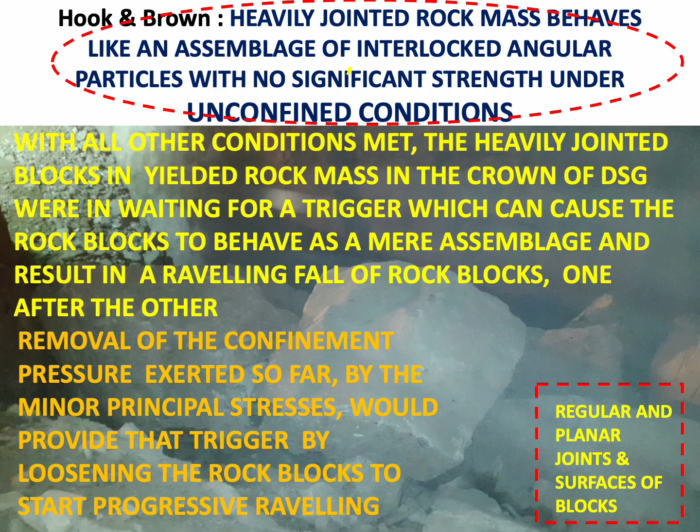It was earlier noticed in the previous slides that since the direction of the longitudinal axis of the downstream surge gallery is almost parallel to the direction of major principal stresses present in the excavated sections, it would be the minor principal stresses, acting in transverse direction to the axis of the downstream surge gallery cavern, which would be responsible to provide the confining pressure to the assemblage of rock blocks of the rock mass in the crown of the downstream surge gallery in order for it to generate the arch action in the crown.

However, the 3D numerical analysis performed by NIRM in 2018 establishes that the confining pressure in the crown of downstream surge gallery is absent in the reach of the hanging wall in the downstream surge gallery.

The transverse minor principal stresses extending into tens of meters above the crown in the downstream surge gallery in the hanging wall in this stretch had become tensile or are very low.

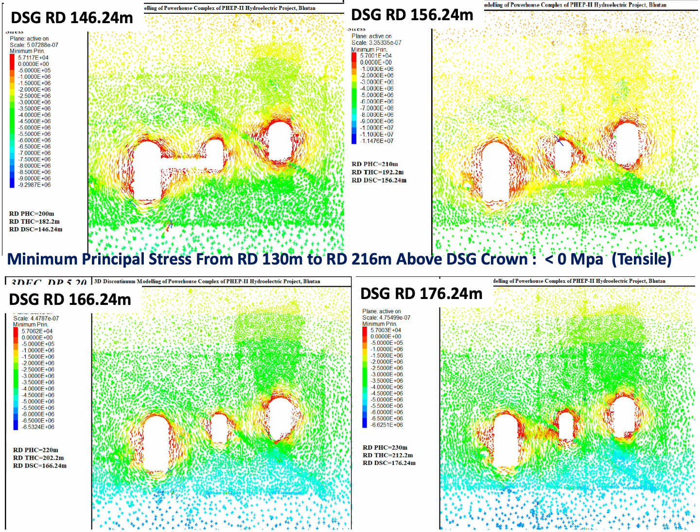So we see that though the minor principal stresses are turned to tensile stresses in all three caverns - powerhouse cavern, transformer hall cavern and the downstream surge cavern - it is only the downstream surge gallery that has the presence of a subvertical major shear zone cutting it right in the middle of its length, which makes a problem of hanging wall present only in the downstream surge gallery.

This plays a major role in the instability of the downstream surge cavern. We see that the major principal stresses, as shown in the previous slides, had got reduced to marginalized value above the crown in hundreds of meters of height, in a shape of a balloon kind of shape.

This was not the case in the powerhouse and transformer hall cavern. The major principal stresses were having significant value above the crown in transformer hall and in the powerhouse cavern.

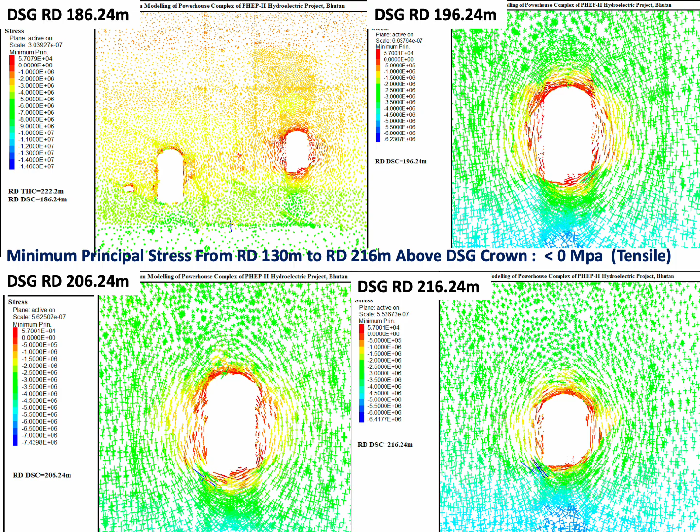As discussed in the earlier slides, due to the presence of multiple sets of joints filled with fractured and crushed material, the rock mass in the hanging wall behaved like an assemblage of rock blocks. This assemblage of rock blocks remained together till the confining pressure was present around them.

With the progress in the excavation depth in the downstream surge gallery, at one stage the confining pressures provided by the minor principal stresses and the major principal stresses have been found to either become tensile, in the case of minor principal stresses, and marginalized, in the case of major principal stresses.

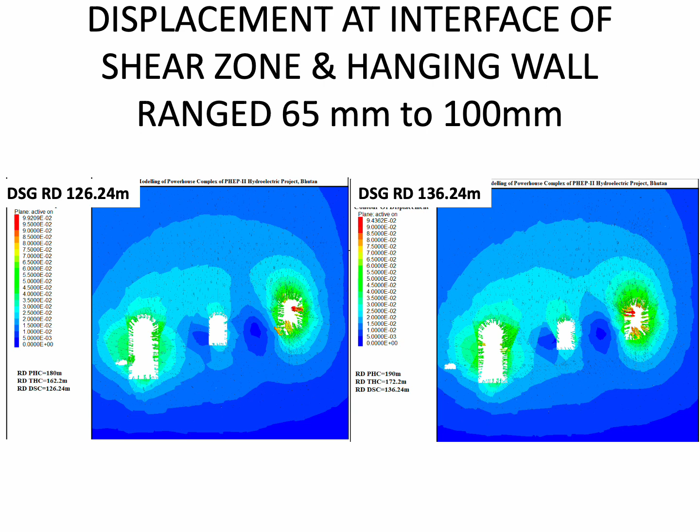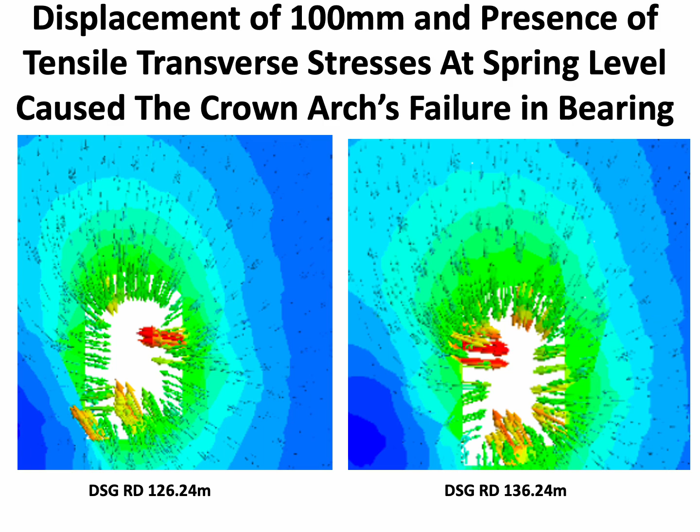It was discussed in the published paper of Stress Instability and Design of Underground Excavations. The displacements at the SPL level in both the walls of Downstream Surge Gallery had attained a value of 100 mm, which caused rock blocks at the bearing level of the crown getting dislodged and thus making the crown fail in its bearing.

The instrumentation observations available also ratify that the pace of displacements in the crown and walls had increased with the progress in depth of benching. On 2nd March 2016, settlement in the walls had reached suddenly to 96 mm when the benching level had reached elevation 590 meter.

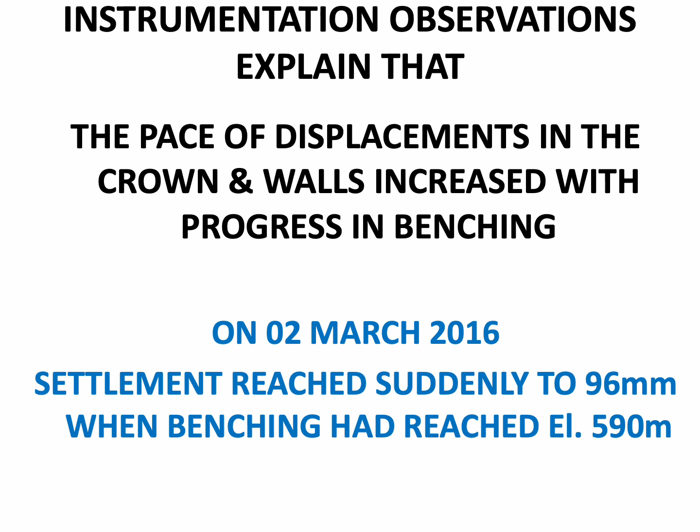The first row mentions the date of observation of instrumentations. The second row mentions the benching level of excavation reached on the particular date. The third row shows the surface movement as captured by the surface targets, and the fourth row shows the stress level achieved in the load cells on those particular dates embedded at level of 620 meter.

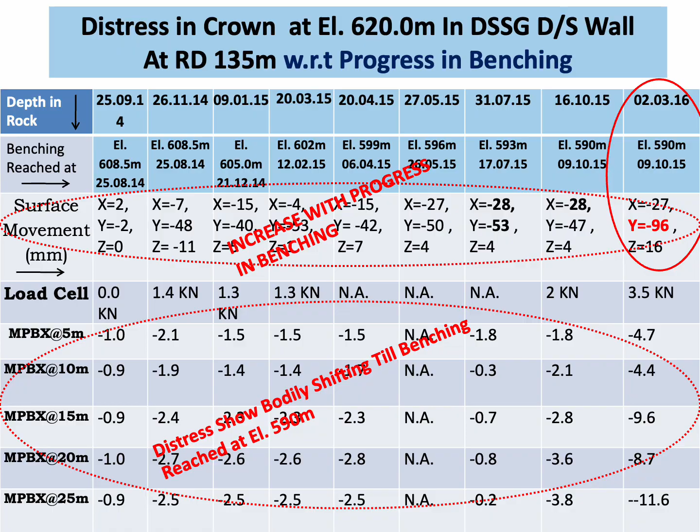Thus, we see that all the prerequisites for a progressive Ravelling failure were present in the case of Downstream Surge Gallery cavern when the benching depth had reached significant levels, that with the rock mass being blocky comprising numerous joint sets, the fracture sets did form potential wedges, and with the presence of problematic hanging wall problem, the confining stresses had got reduced to very low value and also becoming tensile over tens of meters above the crown.

And the geometry of the inclined discontinuities presented by the numerous joint sets guided the gravity-induced structurally controlled fall of the blocks of the rocks in the hanging wall, and as there was a variable strength to a great extent between the parent rock mass and the infilled material in the joint openings and presence of fractured rock mass, the Ravelling failure was guided to extend to greater depths above the crown.

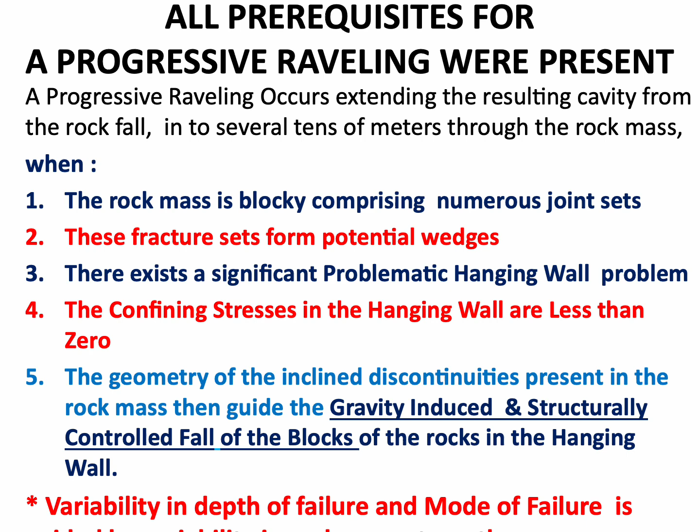It is significant to note that the lack of confinement pressure led to increased strain rate, and thus was the loss of ductile behavior seen. It all resulted in vicious circle of Ravelling failure, as exactly as discussed in the paper Stress, Instability and Design of Underground Excavations, discussed in earlier slides.

It was mentioned in the paper that the higher the confining pressure, the greater the ductility observed. Increasing strain rate makes rock appear more brittle. The absence of confining pressure and presence of zone of relaxation of major principal stresses extending in tens of meters in the crown resulted in fallout of rock blocks in a succession, one after the other. The resulting increase in strain rate made the rock mass more brittle. Thus, cycle of Ravelling brittle failure of rock mass happened progressively with increased suddenness instantaneously.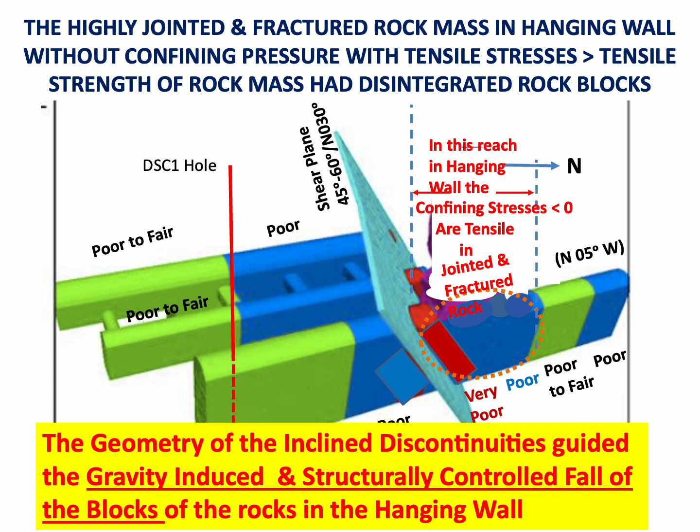The Norwegian Geotechnical Institute was hired by the consultants after the rockfall in Downstream Surge Gallery to study the site and find out the reasons behind the fall. NGI mentioned in its findings that it is believed steel ribs do not and will not provide any acceptable rock support.

This is well understood otherwise also, that steel rib supports provide only passive support, and the steel ribs come into action to provide support only when the rock above the steel ribs in the crown subsides and puts load on them.

The second observation of NGI was that the ribs do not show any sign of deformation, and all the ribs failed at the joints. Third, NGI observed that the steel ribs do not show any sign of bearing load from the rock mass, whereas the rock pillars are more loaded.

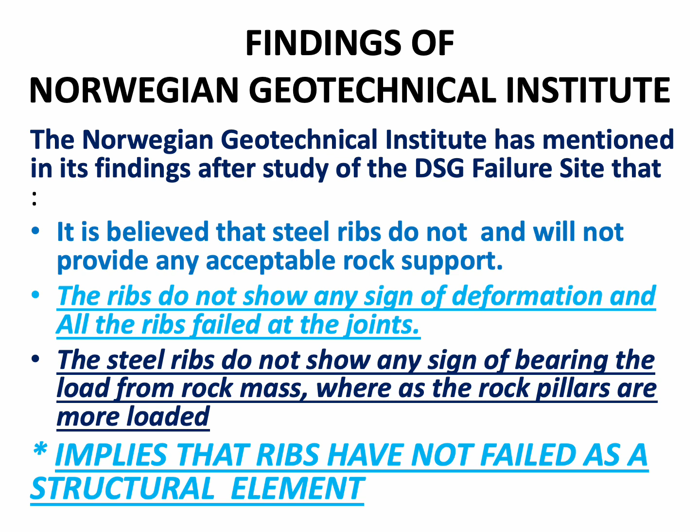Certain specific observations can be made on the behavior of steel ribs as seen from the state of the fallen steel rib parts. Firstly, steel ribs which are lying fallen down are found untwisted and have their arch shape intact. These bear, therefore, no sign of taking excessive load.

Secondly, the bolts at the various joints of rib segments are lying intact after having fallen down. Thirdly, the various rib segments are found separated at connecting joints with joint plate welds broken. From these observations, it can be concluded, as mentioned in the previous slide, that the steel ribs were not acting as a structural element, but failed due to a sudden impact loading being transferred to them at a particular time.

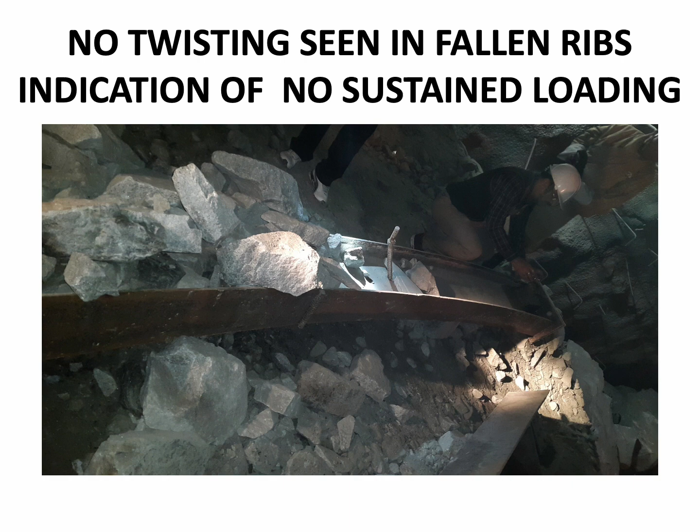In the present slide, it can be seen that the ribs do not show any sign of buckling, which would otherwise be there if an elastic failure from excessive loading would have happened. These steel ribs are seen sheared at joint plates, indicating sudden brittle failure of their welds.

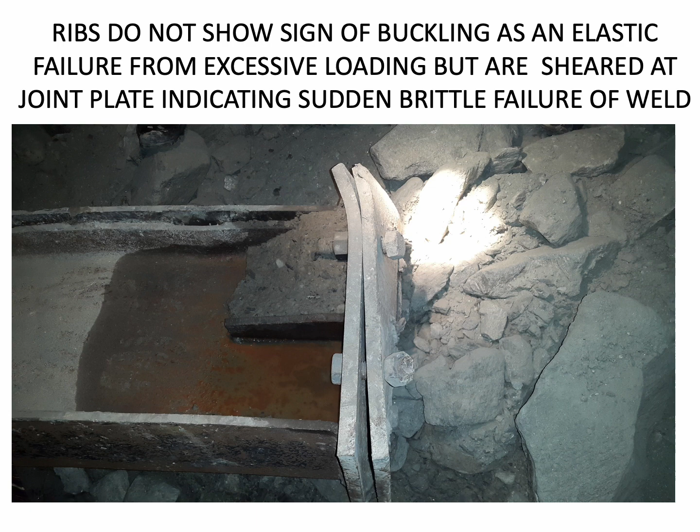The observation of NGI that rock pillars were more loaded and ribs did not bear excessive load implies that the arch action in the crown of Downstream Surge Gallery, even in the failed reach, was intact, and the crown was able to successfully transfer the rock load, acting as a perfect arch of rock, transferring the load to the rock pillars without burdening the ribs beneath it with any load, until the failure of footwall support had happened.

The fallen ribs are found untwisted and bear no signs of taking excessive load, which ratifies the theory that the arch ribs had only eventually become unstable due to withdrawal of wall support beneath it. Due to the impact of their fall, the ribs got broken apart at their segment connecting joints, without even having been subjected to any excessive load.

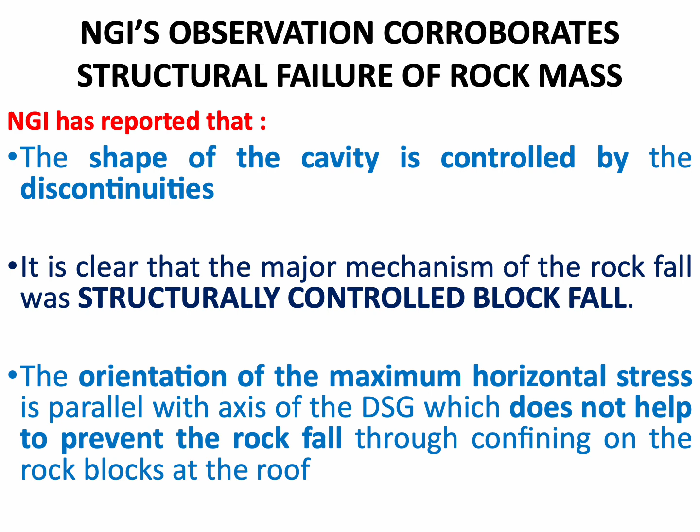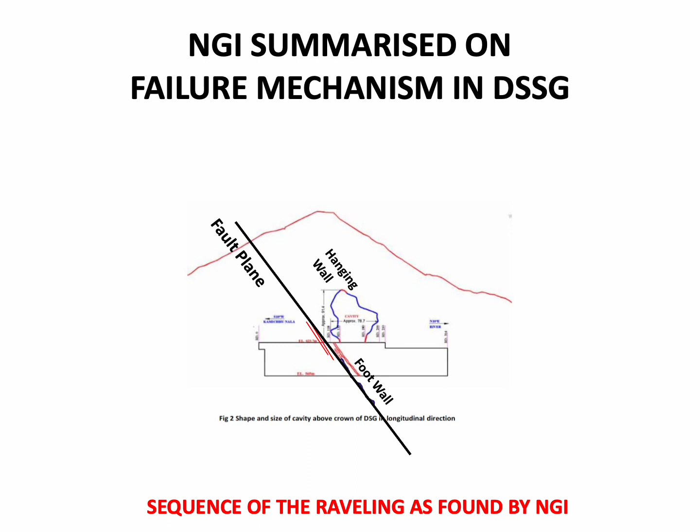NGI has summarized the failure mechanism in the downstream surge gallery: the rock mass in the footwall of the shear zone first started to move down because of insufficient support and stress relaxation.

It says that later on, as the key block in the footwall moved, the rock blocks at the hanging wall moved down flowingly.

NGI's findings on footwall failure also ratify what the instrumentation observations concluded. Instrumentation observation indicated that the distress in the wall support to the crown, in the reach traversed by the shear zone in the downstream surge gallery, from RD 135 meter to RD 195 meter, increased as excavation in benching progressed. The settlement in the wall at the support of the crown level was 96 millimeter as on 2nd March 2016, when the benching had reached an elevation of 590 meter.

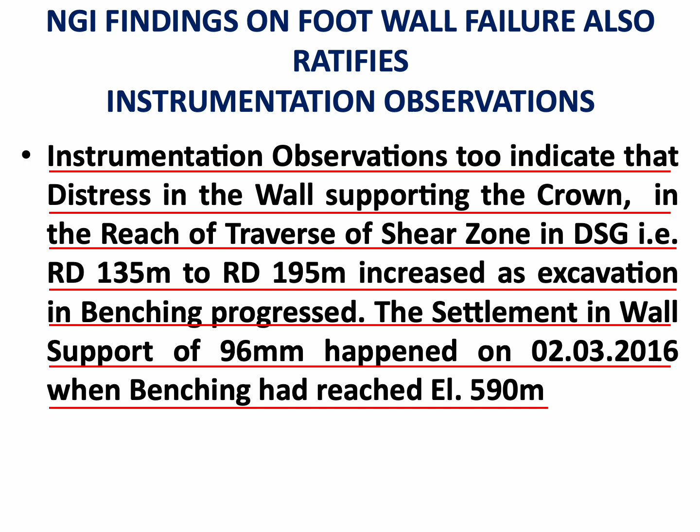Assessment of the size of the cavity formed was done using cross-hole tomography, and it revealed that the cavity formed above the crown of the downstream surge gallery was 91 meter in height, 70 meter in length, and 45 meter in width.

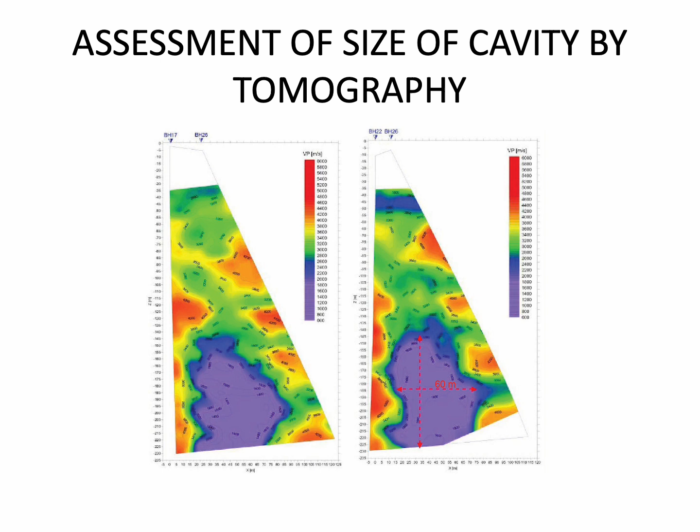The extent of the cavity formed was also confirmed using LIDAR technology with CMS V500 equipment.

A similarity of the shape and size of the zone of relaxation, as seen in the results of 3D numerical analysis done in 2018, to the size and shape of the cavity formed as captured using the LIDAR-based cavity monitoring system with CMS V500 camera, and by resorting to cross-hole seismic tomography conducted at site, is noticed.

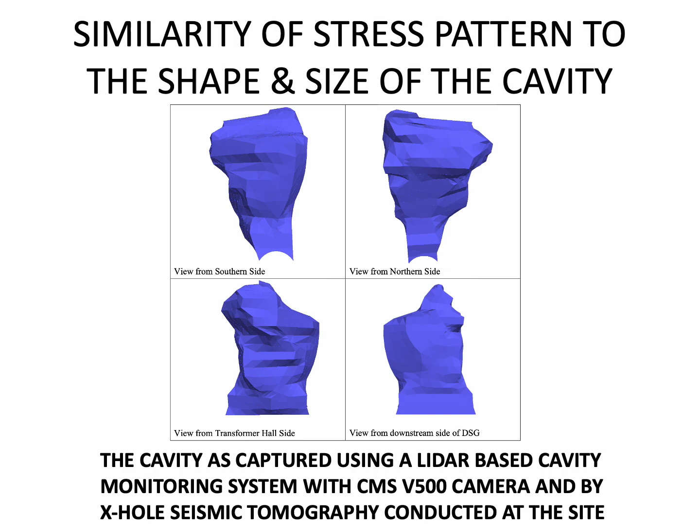It is thus established that numerous potential wedges, due to absence of confining pressure, had resulted in the fractured rock mass undergoing gravity-induced and structurally controlled fall of rock blocks in the hanging wall of the downstream surge gallery. The geometry of the inclined discontinuities further guided this gravity-induced and structurally controlled fall of the blocks.

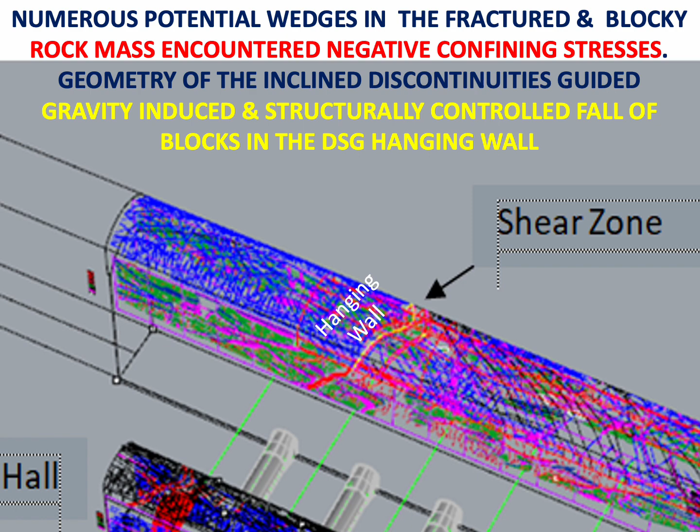It is significant to note that the shape and size of the cavity formed from the rockfall is identical to the shape of the zone of relaxation seen in the plot of major principal stresses in the reach of the hanging wall, but this was seen only in the downstream surge gallery and not in the powerhouse and transformer cavern, with minor principal stresses becoming tensile in the affected reach.

Besides the 7 crucial technical lapses discussed in earlier slides, the 8th and very crucial lapse was in the administrative controls made for the project. All the project controls were empowered to the designers. This administrative lapse produced a major conflict of interest in the different roles performed by the designers, depriving the project of the various checks and balances to be applied in implementation of the project.

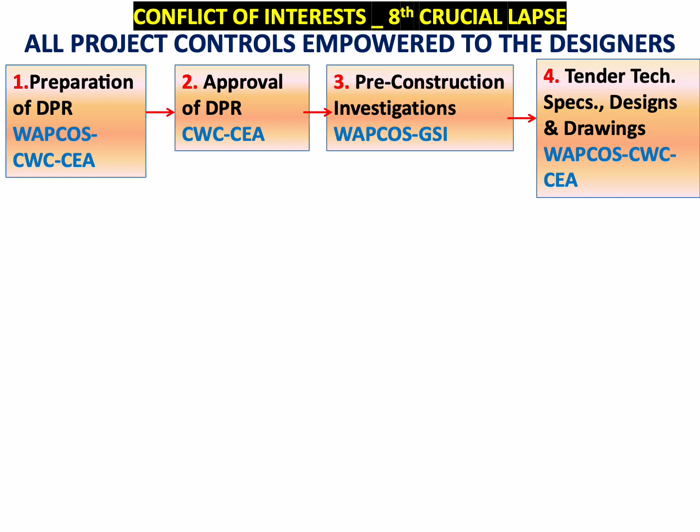From the role of preparation of the detailed project report, scrutiny and approval of the detailed project report, preparation of tender specifications, preparation of tender stage designs and drawings, carrying out of construction stage investigations, preparing detailed designs for construction of the project, carrying out investigations to evaluate problems faced during construction, preparation of solutions and designs for resolving those construction stage problems, and also scrutiny and approval of these solutions decided by the designers were also to be approved by the designers itself.

So all these important roles were all empowered to the designers, which deprived the project of various checks and balances to be introduced at every level of project implementation. And this was a very crucial lapse.

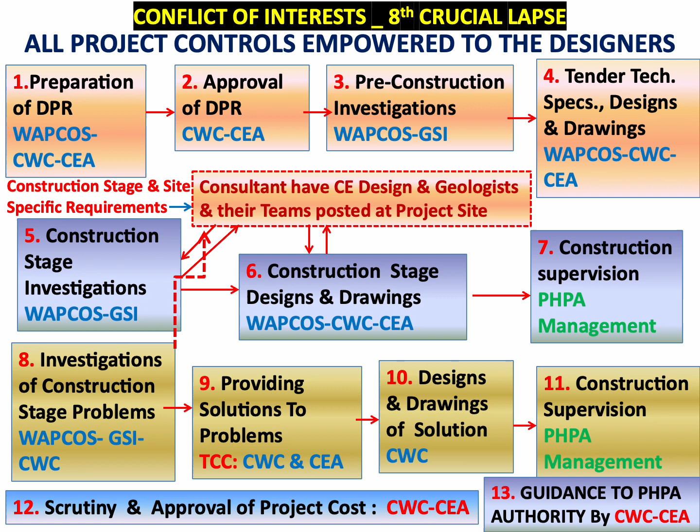This failed the project in carrying out proper geological investigations for preparation of the detailed project report, in carrying out proper and adequate geological investigations to base the designs and drawings upon, to carry out the proper designs and drawings to be implemented at the project site, to evaluate the lapses in the designs and drawings, and to evaluate the consequences and find solutions to the problems faced in the project construction. All checks and balances to be performed in these roles were totally absent, because all these roles were to be conceived, carried out, evaluated, scrutinized, and performed by one agency, the designers, the Central Water Commission.